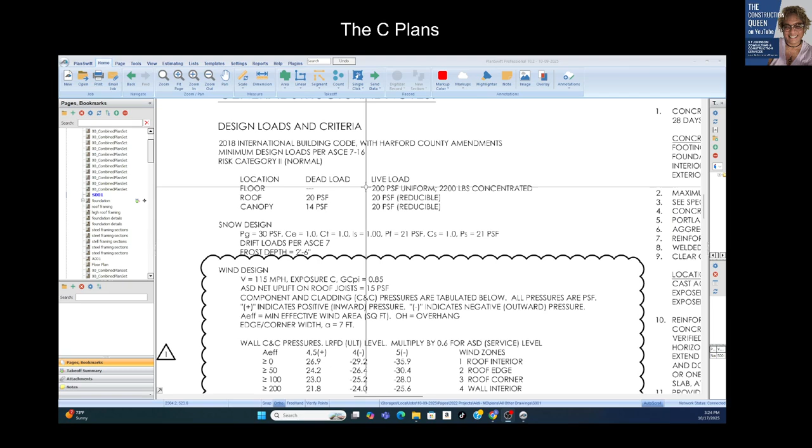All right, so we are looking at the cover sheet for the structural set. And if you look at any cover sheet, you're going to find load information. When they say load, it's basically weight and how much the building can hold, including the building itself. Now, as an estimator, it's not really something you care about, but it's good that you understand it. Part of the quiz is really about helping you understand that. So let's talk about the different types of loads.

There are three different types, and the structural set is designed to address all three, depending on the purpose of the building, what the building is going to be used for. It has to be designed to carry the weight of whatever's inside the building and hold up the building itself. So we have three types of loads: dead loads, live loads, and environmental loads.

The dead loads are basically just dead weight, right, permanent weight. That consists of the roof framing, the walls, the concrete slab, everything within the building is part of the dead load. The live load is temporary or movable stuff like people and equipment and snow and furniture.

Then we have environmental loads, which are wind, hurricanes, earthquakes, seismic activity, and soil also takes into effect. Depending on the type of soil you have, it really depends on the type of foundation you're going to have to hold that dead load and all the live loads that come through, plus all of the environmental loads that could happen every winter.

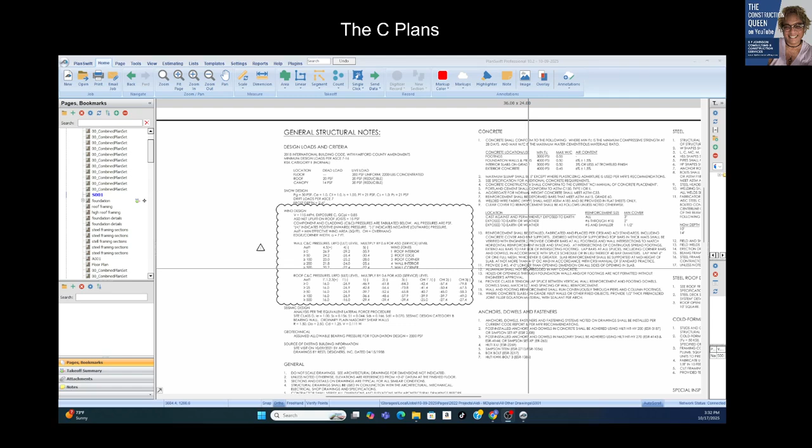Okay, so now let's look at the cover sheet. Of course, the cover sheet is going to give you all the information about what is here. And this is not so good of a cover sheet because I don't see the sheets that are comprised within the set, but they're here.

All right, so the foundation. When you look at a set of plans, they're usually starting from the bottom up. So the first set you'll see would be, and it really depends, I shouldn't generalize, but in most cases you'll see the foundation. Okay, and so what do we see? It's the bottom, and the foundation comprises two or three components. It really depends on what the building use is.

Right, we have the slab. Okay, so it's going to tell us the thickness of the slab on grade, and that W/WWF is not a wrestling team. It is a configuration of mesh rebar that we put in the slab for reinforcement. Okay, so we have to know what that is. Okay, and then we have the foundation. So foundation footing, or the perimeter of the foundation.

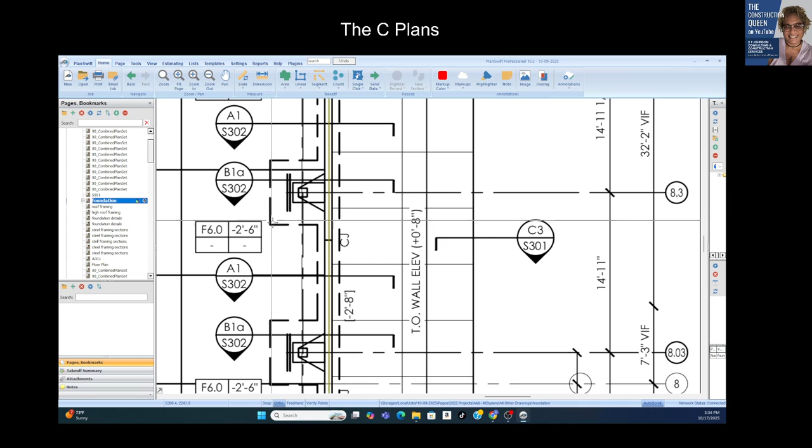A foundation is pretty much three components: the slab on grade, the continuous footer, which is basically the perimeter, and all of the section views outline where we have to go to get details about all the configuration of what here is representing a foundation footing.

So how do we know the component parts in a structural set? Everything, I mean, you look at this, it tells you thick set tile, finished floor, but it's on top of a 4-inch concrete slab on grade.

We know the structural set is the set with the least amount of plans, the least amount of sheets, I should say. We have the foundation, we have the framing, we may have the shear walls if it applies, and then the roof framing shows us also the headers. So we don't have very many sheets in a structural set. Everything that comes after that are all of the details and the section views.

When we look at the foundation plan again, a foundation is three component parts: the slab on grade, the continuous footer, and then, in some cases, we're going to have column pads, which is represented here.

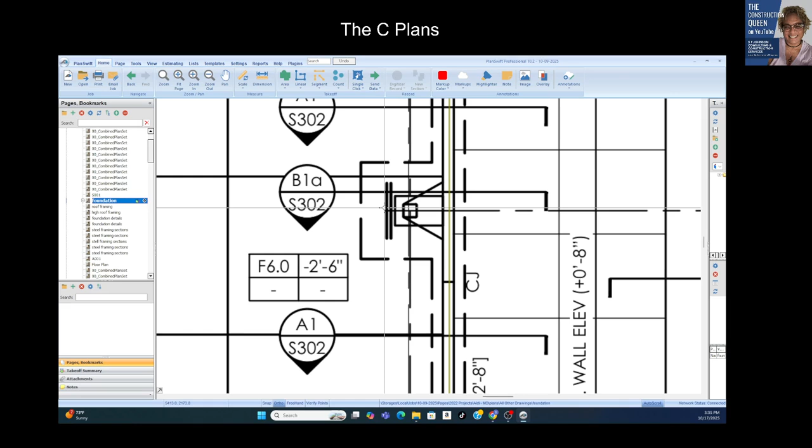So how do they represent the column pad? It's just a square. Imagine in a parking lot, there's always some square piece of concrete that something is sitting on, maybe a light pole. It's the same thing here, where the column is represented by this symbol, this square, and that tells me we have a column inside what they call footing 6.0. The column pads are always square, so they don't have to give us the other dimension. It's 2 foot 6 inch square, so both sides are 2, 6.

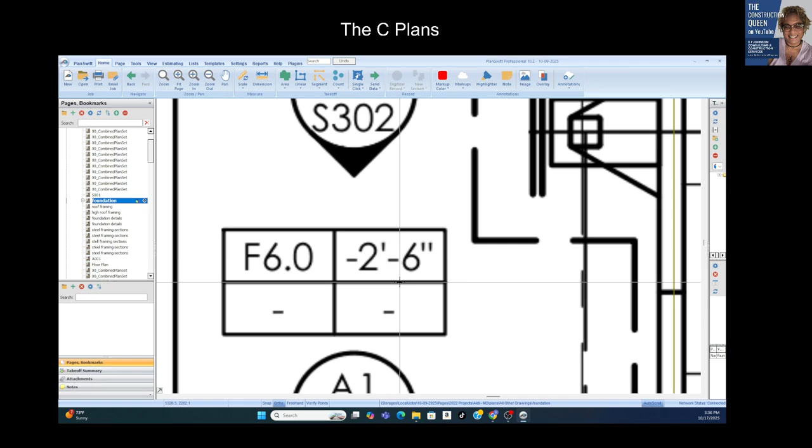I mean it's really simple. So this is the plan view, the view from above, the most basic of the views. What can we do from the plan view? The only thing we can really do is measure the area of the concrete pad, and we can also measure the continuous footer.

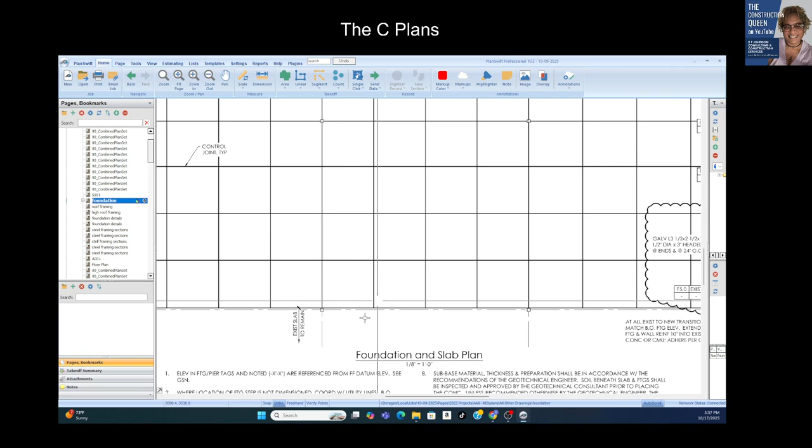But it looks like, and I don't believe that this is from the ground up, because there's a lot missing. This makes no sense if it's from... yeah, see, existing slab. So it's just a portion of it getting replaced.

So what we have to do now, if we were going to do the takeoff, we need to know this is a continuous footer of some kind that's going to be represented when we look at image A3 on picture S302.

This is a section view marker where it's his little head, his hat, his leg, and his foot. That lets me know that whatever I'm referencing, looking from this direction, it's only this portion of the wall. Section view markers are very tricky because you see we have so many lined up, and you have to make sure you understand the difference, where it breaks off and continues.

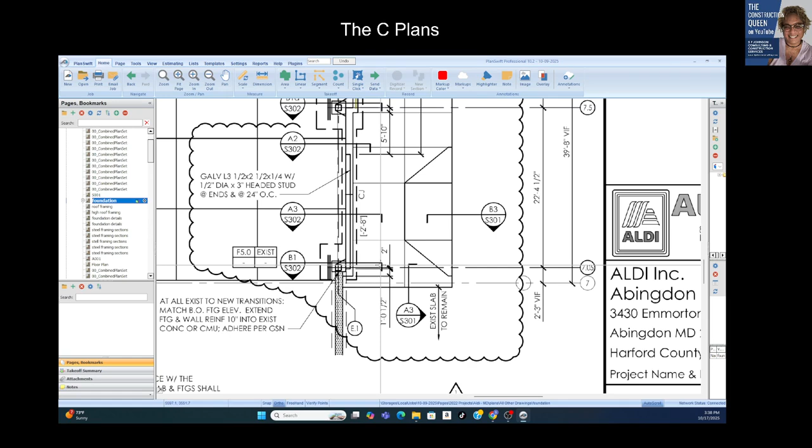It's really not that serious. As long as you represent the section that you see, you can go over by 5 feet and you'll be all right. So what this tells me is that A1 over 302 is the section of the continuous footer from here to there. But we have that in quite a few places, right? So it's from here to there, and we stop where we see the other section view marker. It's confusing sometimes for the first time, but it's not to where you're going to lose your mind. You just have to know where to start. This is kind of lame.

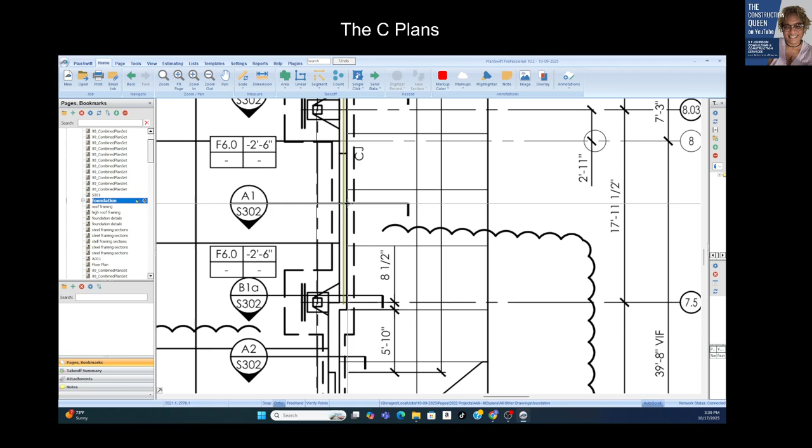But let's look at what it's trying to show us. Every time I mention a section view marker, whether it's a wall or a continuous footer, you want to think about it this way: think about the view you're going to see at A1 over S302. What am I going to see? I'm going to see the interior construction at this portion of the continuous footer.

So you want to imagine that his leg is a knife, and this is like a little piece of French bread or whatever, and you're going to cut it and open it up, and you're going to jump right in the middle, and look in the direction that his little hat's pointing.

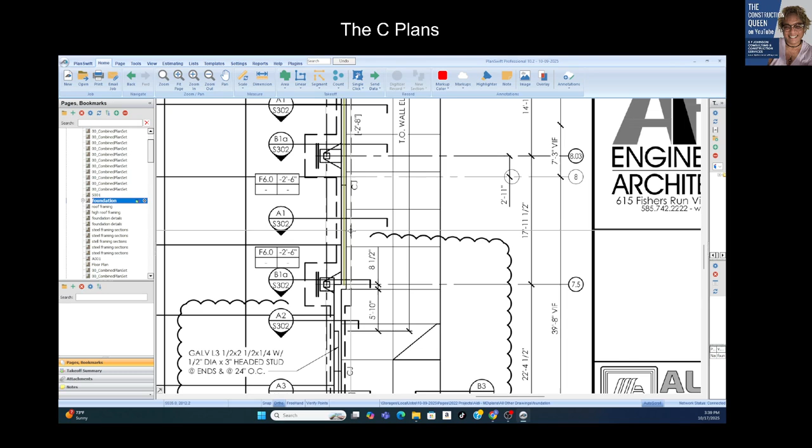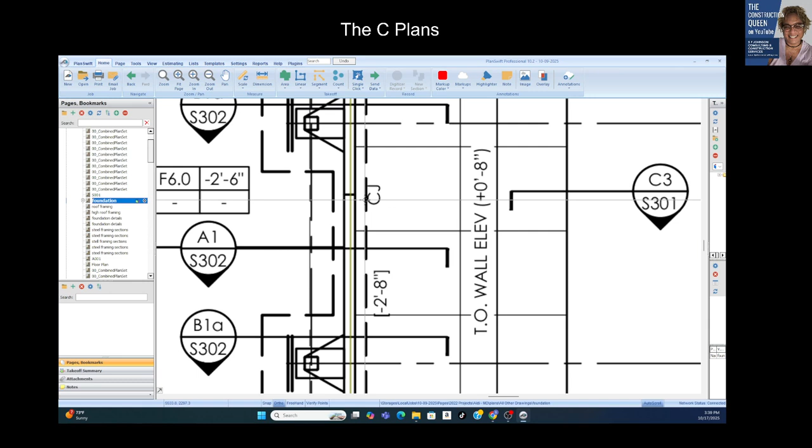And what you're going to see is just the interior construction. So why do you need to see that? Well, if I'm the concrete person, I know that continuous footer has a depth, a width, and a height, and I have to determine that in order to do a proper takeoff - to figure out how many cubic yards of concrete I need, how many linear feet of any particular size of rebar. That's what we have to do.

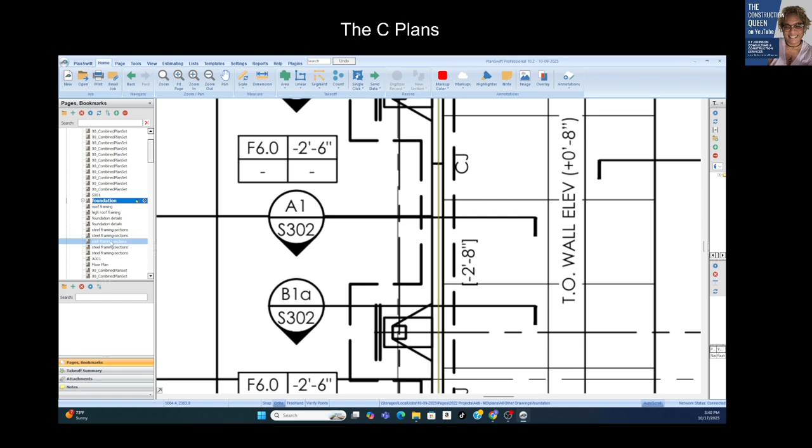All right, let's go look at any one. Let's go look at image A1 over S302. We've got to find S302 somewhere over here. A1, 302... 301... Okay, image A1 - it always starts up here and then goes to, like, so stupid how they do it.

Okay, so what do we see? We cut it like a knife, and now we're looking in the direction. So this helps you tremendously, right, if you're the concrete person.

Now I know that the continuous footer is 2 by 1, and I know that it has a stem wall - we can call it a stem wall - and we can determine, because it's to scale, the height of the stem wall and the rebar configuration. I have an L I've got to put in.

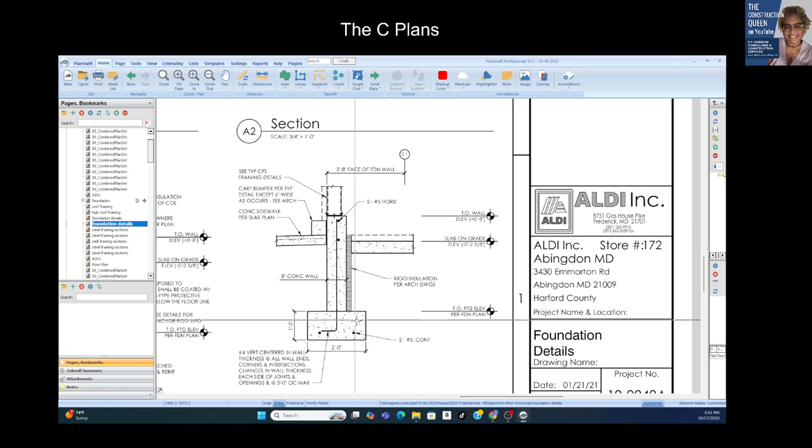So what's this mean, right? It could be a piece of rebar, right? We cut it like a piece of French bread. Now we're standing in there and we see how the bread is made. It's pretty good, huh? The bottom - let's start from the very bottom - so we have two number 5s, number 5. I've been doing this all day and talking.

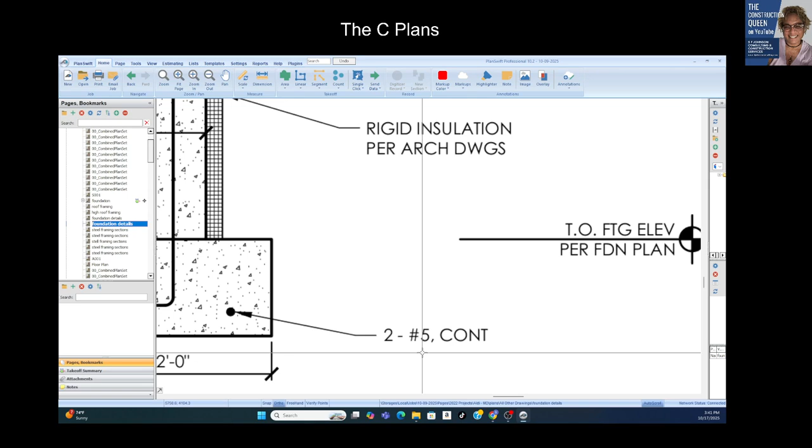Okay, two number fives continuously. What's that mean? So the whole length of that section that I measured - in this case, probably the whole perimeter. This one section is probably the general footer, typical, right? Typical exterior wall section. So it's going to be 2 times whatever our length is of the perimeter wall. 2 times that is our number 5 rebar. Bam, we got that takeoff done.

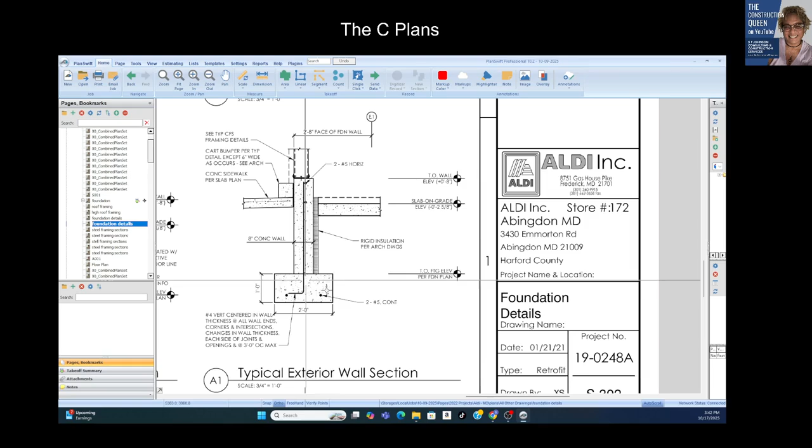For this one, we have to make it an L, but we have to determine the height of the L - how long is this piece? Well, it's to scale, so you really don't have to guess. You can measure.

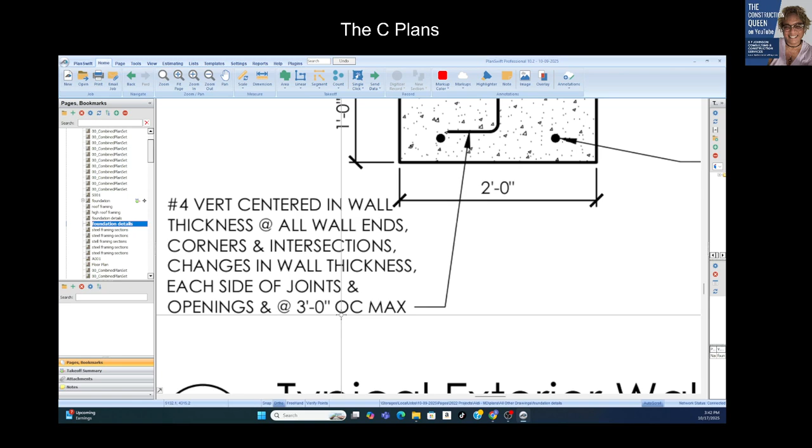So I need - and we're going to put it at every 3 feet on center max, right? So we need to produce these L's, and we have to put one every 3 feet. So if we had 300 feet, 300 divided by 3, then we'd have to make 100 of those and put it every 3 feet. That's how that works.

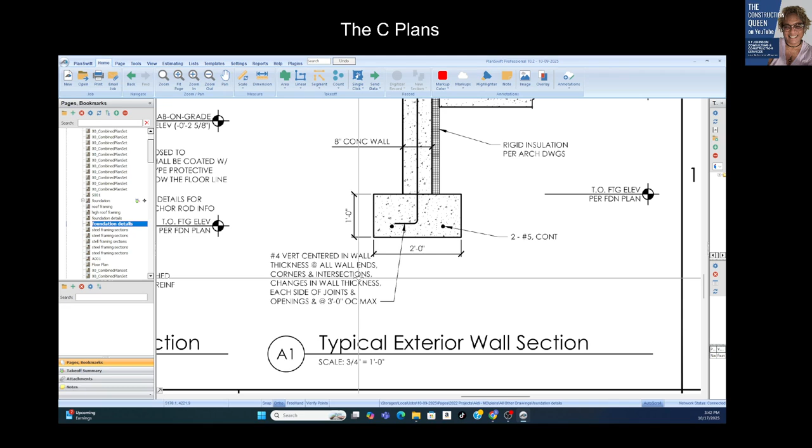So 100 times whatever the length is - okay, I have an additional number 4 that I have to produce. Then you work your way, you just go all the way up. And then we have two number fives horizontal along the perimeter. So basically, in terms of rebar count, it doesn't make a difference, it's the same - you have four number fives on that perimeter, and then however many of those L's you have.

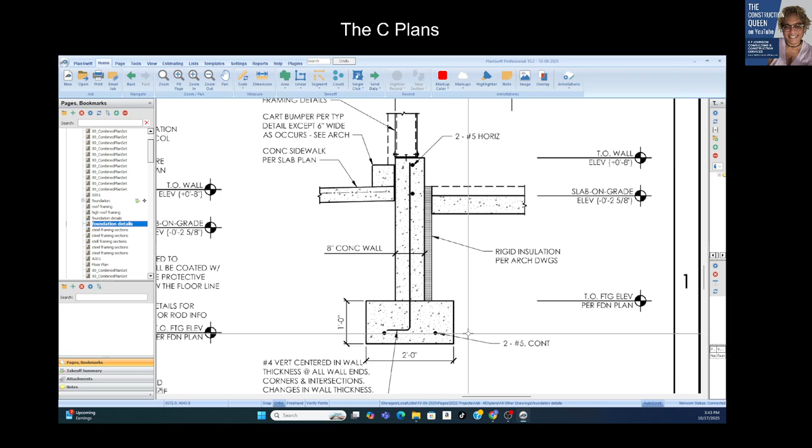Now for cubic yards, you turn everything into cubic feet first and divide by 27. That gives you how many cubic yards of concrete. Your concrete needs three dimensions in order to get cubic - cubic is three. So one dimension is the width, the height is the second, and the third dimension is the length. Whatever we determine, we measured the length. So you multiply all those together, that's cubic feet, divide by 27, you got cubic yards.

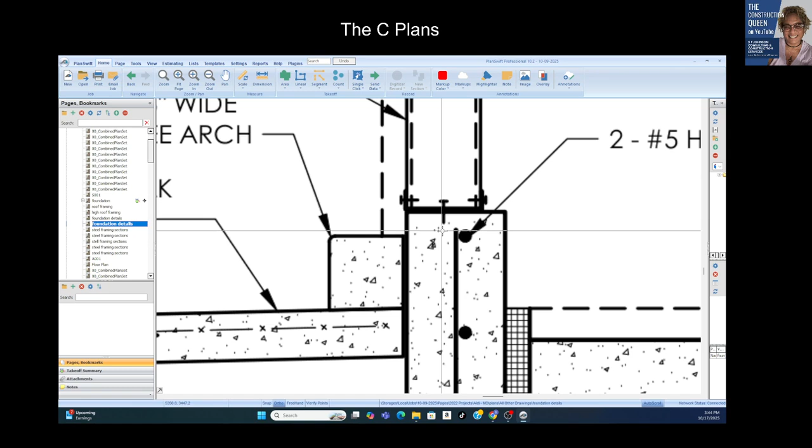Same thing with this - what's the width of this wall, the height of the wall, and however long it is. And then we have these - how many? We've got to do those. If we're doing the structural portion, those have to be in, or maybe not - it all depends. But we see that they're not marked here, so they're not giving us detail about it. So it's somewhere else in the plans. We won't worry about it.

Okay, but we just want to focus on this, and all of the section views will give us the same thing. So existing is already gray, so what we don't have to worry about is this at all. We just have to do whatever the new stuff is.

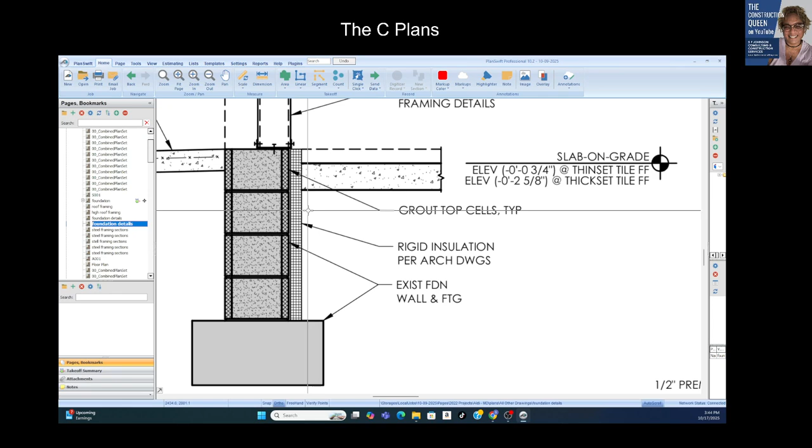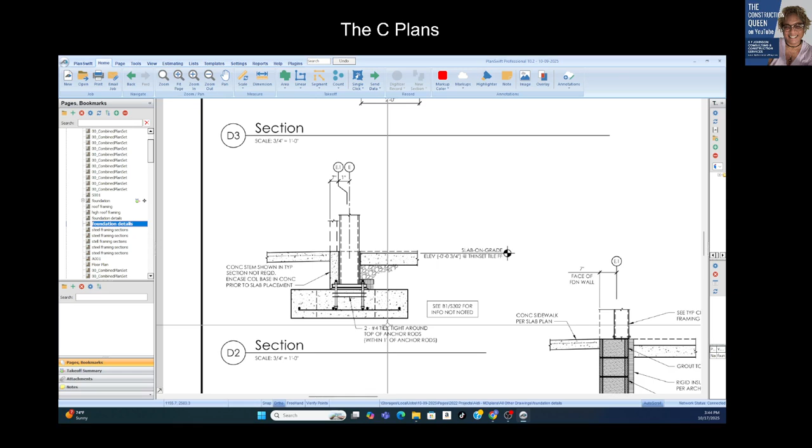Okay, so we have to do all the new stuff - the insulation and whatever else. The section views are critical because it's good when they're drawn to scale, so you don't have to guess. It's easy to eyeball it because they'll tell you this is 2 feet, and then you can figure out the rest - that's another 2 feet, that's 2 feet, maybe that's 8 feet.

I don't know, but it would tell you somewhere. All of the footers have a schedule for each one, so you know the dimensions. And they're always square - so if it's a 3 foot footer column base, it's 3 by 3. So that's the foundation.

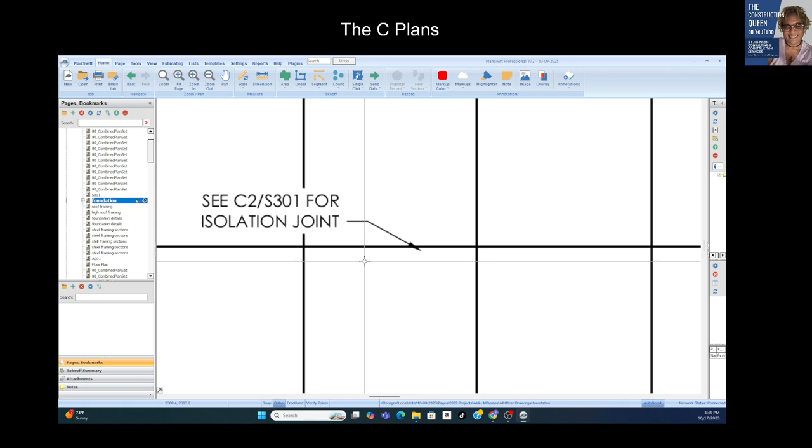That's the first part we'll see, and there's always other stuff you have to do. All of the control joints - you have to look at the details on exactly how they want the thickness, what they want in it, all that. You have to be able to look at that. When you measure the length of the control joint, whatever you see there is the same in terms of material and takeoff - it's the same length. Same thing with the footer.

Now let's look at this one, because it's giving us a section view through the column pad - not information about the continuous footer, but about the column pad. If all the column pads are the same, they wasted a lot of ink drawing them all out instead of just doing one and marking it TYP. So every time you see that symbol, you know it's the same makeup as the one marked TYP. If you ever see that, that's what it means.

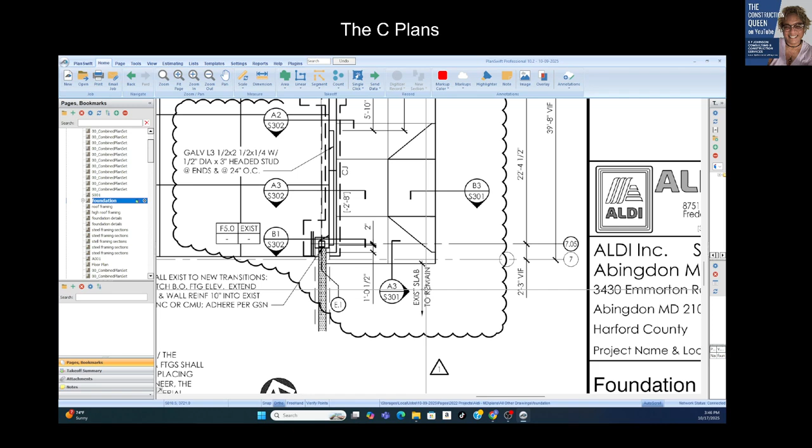And here they're giving you how you have to reinforce the new to the existing - that's really important. The revision cloud means they made some changes, and I see a lot of revision clouds without a note. You have to have that, because it's pointing you to what to read about what was changed.

All right, so let's look at one of these to see the difference between the section view at the continuous footer and the section view at the column pad.

B1 over - it's getting late, and I'll be 61 in December, so I'm blaming everything on age these days. All right, B1A over 302. Let's see, I keep going too far - 302, 301, 302. All right, B1A, where is it?

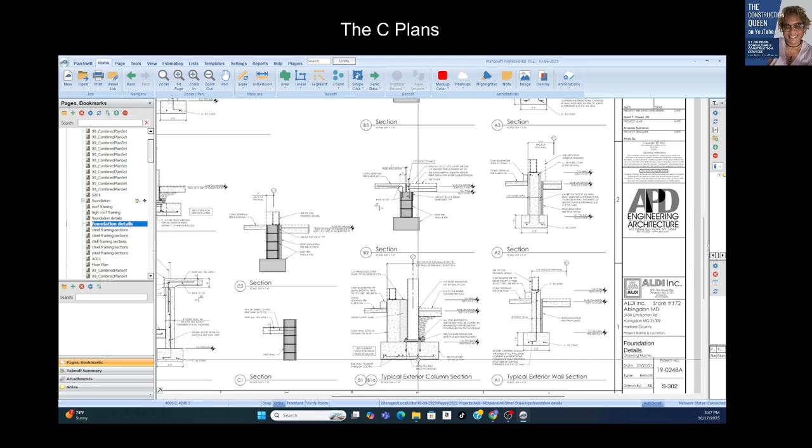Here we go, okay, so yeah, that is our column right there - that's our column pad, edge of continuous wall, the continuous footer beyond that. So the continuous footer cuts off somewhere inside, maybe adjacent, but we can see that from the plans. So what we have to do in this case - it's got a lot going on.

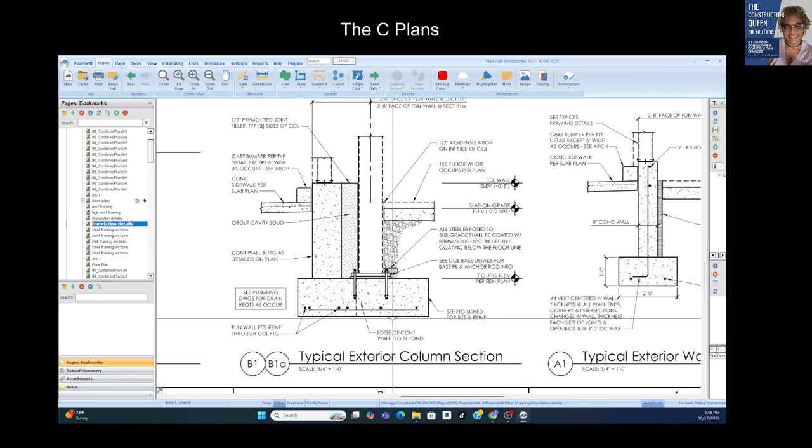Okay, so it has this column pad, and we have to determine this total. Again, it's probably just up against the column pad. You have to see how far this continuous wall is as detailed on the plan - so we'd have to look at that one, because there are a couple of costs related to this when we talk about the takeoff and breaking it down.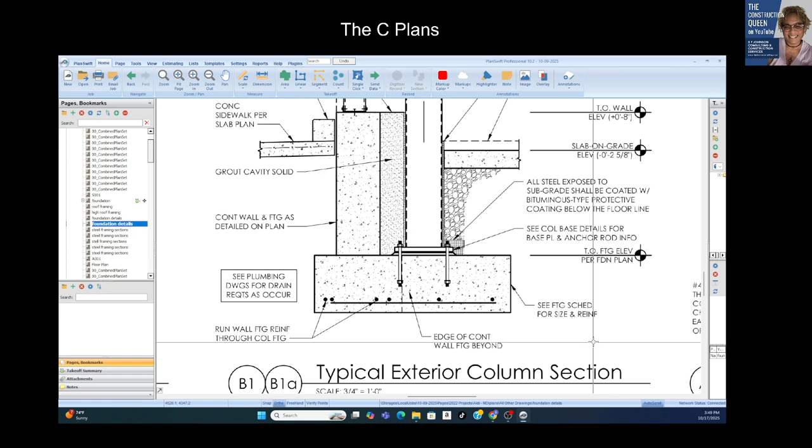The footer - look what the footer has on it, a lot, right? So the footer has one, two, three, four, five, six. And again, it doesn't give us the information here directly - is it number five, number four, whatever - because it tells us this instead: see your footing schedule.

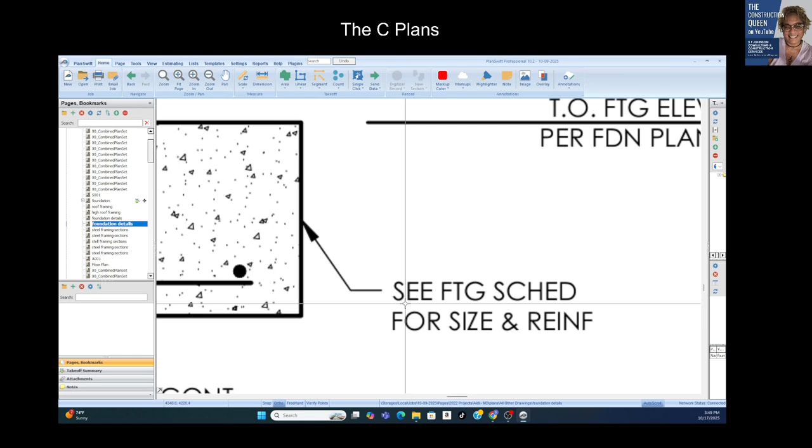Each one we saw, like F6, F5, and so on - well, it's all over there. Let's find it. It might be on the front part, you never know. And I don't have my glasses on, so I'm really tripping. Oh, there we go, there we go.

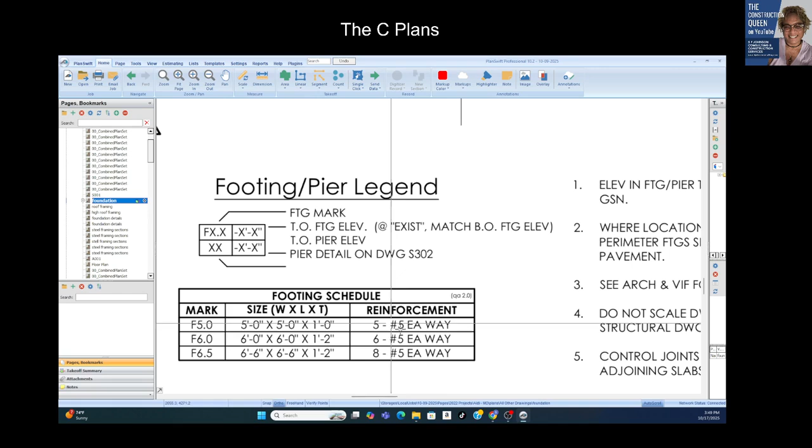So we only have 5, 6, and 6.5. They're 5 by 5 by 1, 6 by 6 by 1 and 2 inches, and so on. So one has 5 number whatever's, and 6, and then 8. That's easy - like my grandson says, that's easy.

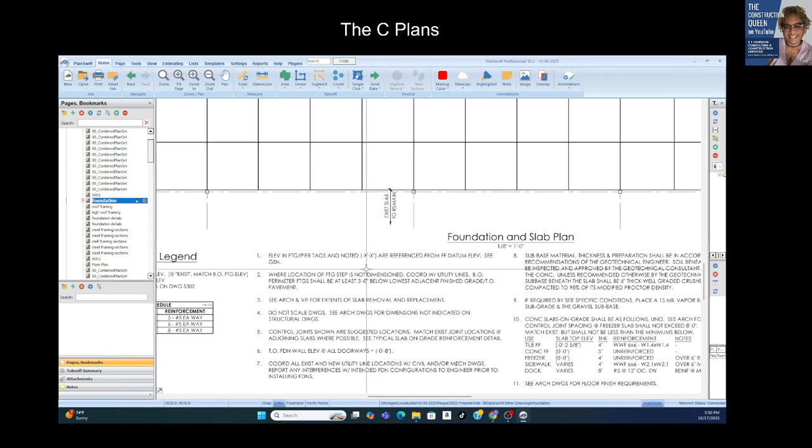And if you have a good tool like we do, you will get the cost per column pad. It will include the concrete, the reinforcement, the excavation, and maybe finishing - something else, I don't know. And that's how you do that.

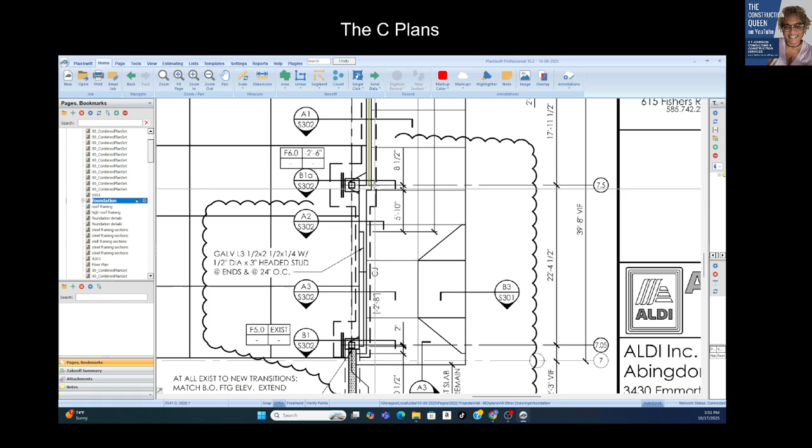Okay, the length is all based on the plans - that insulation, that wall. Let's see where that wall is. That's very hard to determine. Maybe right here, that's kind of tricky. I just have to guess. It looks like more from here to there. We'd have to determine which side was the wall and which side was the insulation. Oh, that's probably the wall side, and that's the insulation. Makes sense - the insulation would be on the inside, right?

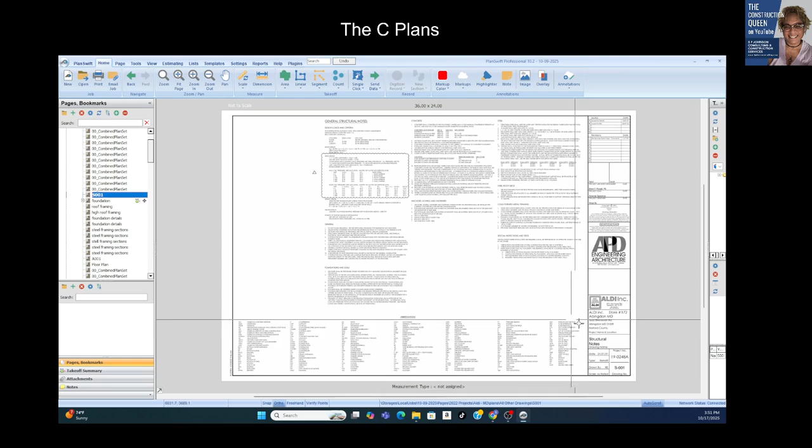Okay, so that's the first part of the structural set, the foundation. The second part is the roof framing.

Stacy is going to take a break, but you won't know it. I'll be right back.

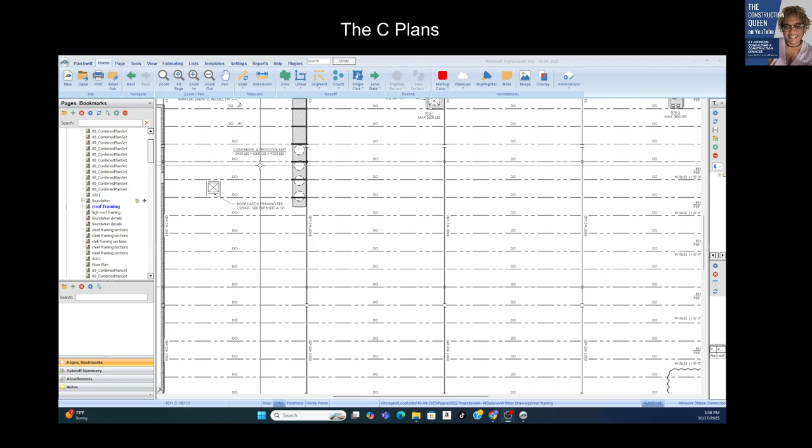All right, now let's look at the structural framing plan and how they represent the portions of the framing. We know that structural framing always begins at the roof, if there is any. How it's represented really depends on the type of member. We say 'member,' which is a generic term for the framing piece - a beam is a member, a column is a member, a joist is a member. When we talk about structure or framing, we always try to use the right lingo.

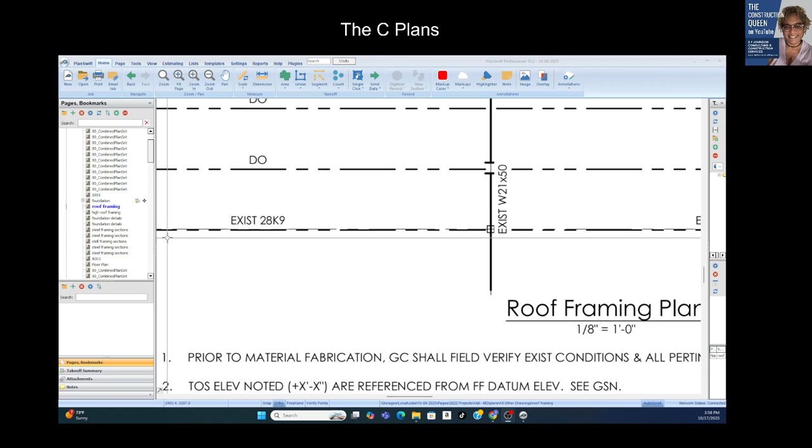We say member. So what we're looking at here is they're showing us that a lot of it already exists - most of it is existing, they're just modifying it. But just so you know, there are so many different types of structural framing members - there's beams, there's columns, made of wood, made of steel, iron, whatever.

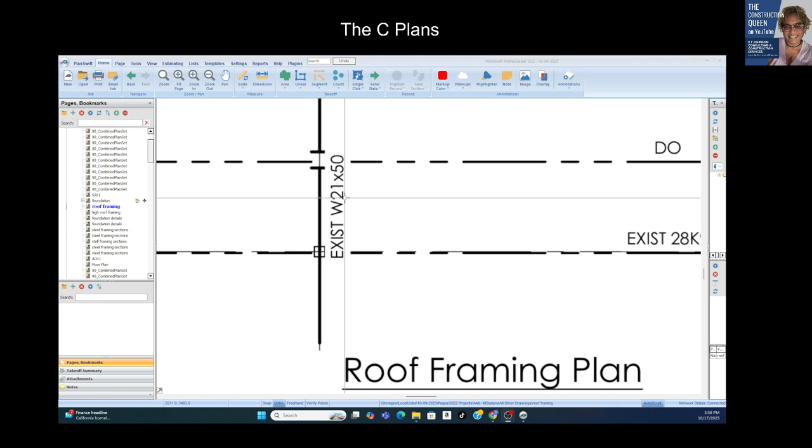But we know that this is a formed metal, and this type is fabricated metals. When you see the W beam, that's what those are - beams, right? And it could represent the beam or the column. In this case it's going this way, up against this line.

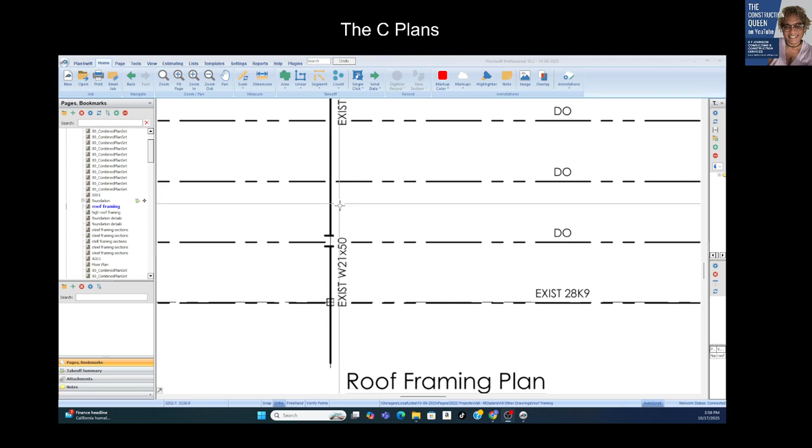So you've got to think structural framing - this is the framing plan, right? The plan is the view from above. It's as if we're in an airplane, there's no roof or anything, so we just see the roof framing. And so what we know from the plan is that these portions are W beams.

Really, the number on the beam signifies the width of one of the parts of the beam, and the second number represents how many pounds per linear foot. Remember, structural framing is all about loads and weights and stuff. That second number after the times symbol signifies how many pounds per linear foot that beam can hold. Which ones to use depends on the structural engineer, but when you're estimating fabricated metals, anytime you see that, those are priced by the pound, not by the square foot or linear foot.

So you have to be able to convert that beam to a weight, and it's very easy to do. If in this case it's 50 pounds per linear foot, you just figure out how many linear feet you have. If you have 1,000 linear feet, you multiply 1,000 times 50, and that's the weight, typically in tons. Yes, fabricated metals are priced by the ton, not by the square foot, not by the linear foot.

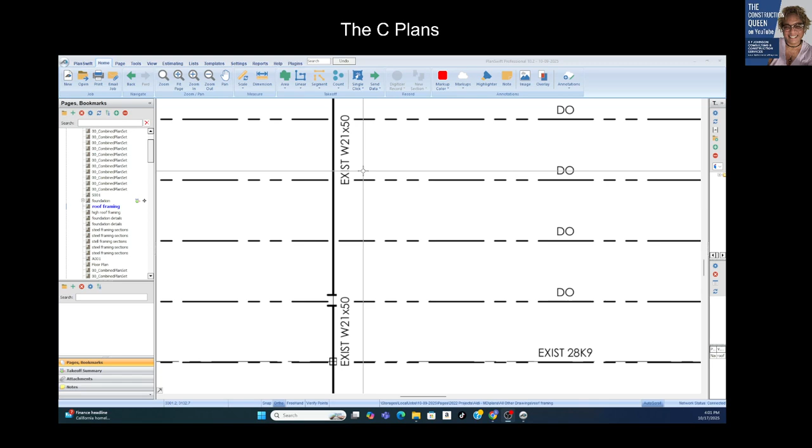So anytime you use beams like that, you have to do the math and determine how many pounds you have. Same with a W18 by 35 - that means it holds 35 pounds per linear foot. So once I know how many linear feet I have, I can determine the weight easily.

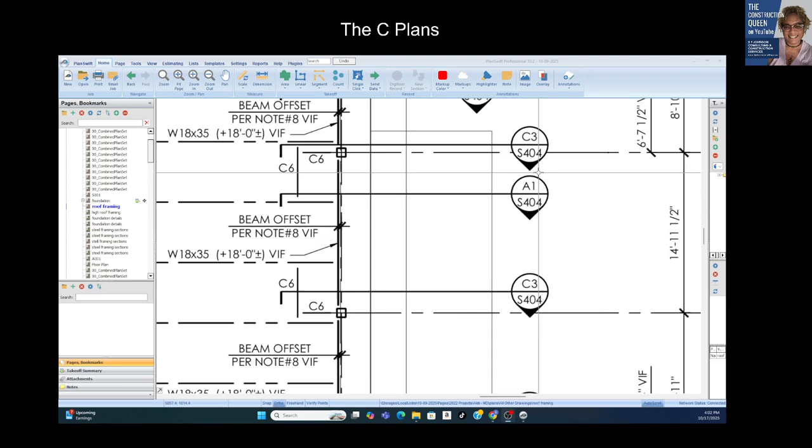Okay, section views still apply. Now let's look at some of these, because these section views don't apply to the foundation. Even though some of them may be the same, we're not looking from the perspective of the foundation - we're looking from the perspective of the framing, and all that good stuff.

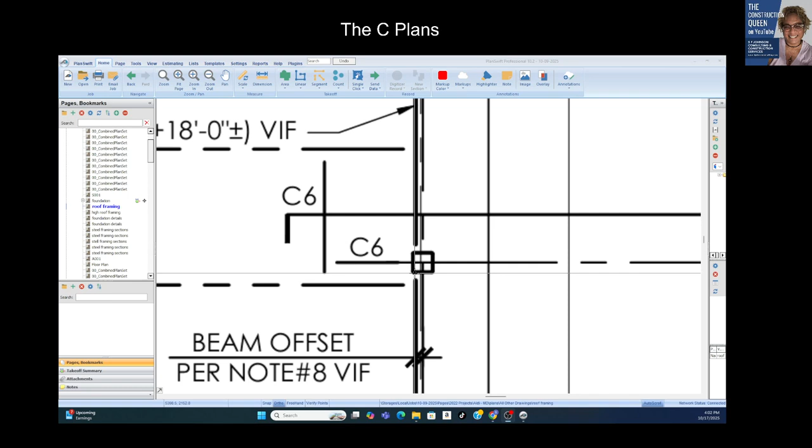Okay, so we know that this is column 6. We don't see that column pad because I'm sure column 6 is sitting in a column pad that we just saw on the foundation plan. But why don't we see it here? Because this is not the foundation plan - this is all about the framing and the headers and all that stuff.

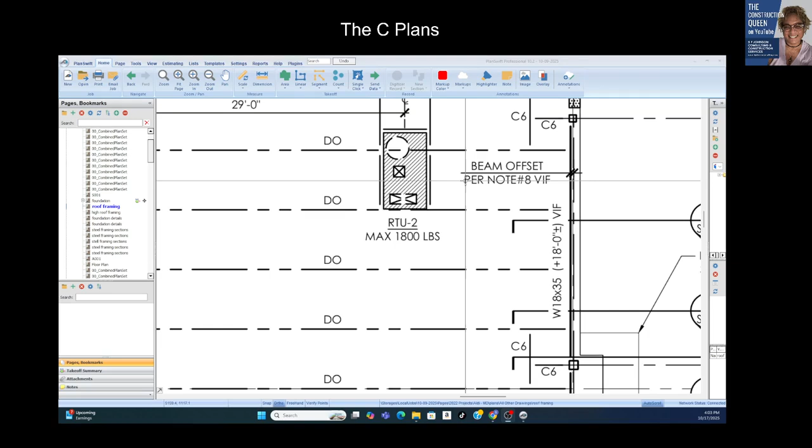All right, if there are any headers, it looks like we have some new rooftop units installed. They're heavy. Okay, and it does say typical here, so whatever we see there, we can just do one and multiply it by however many we have. It looks like we have 2.

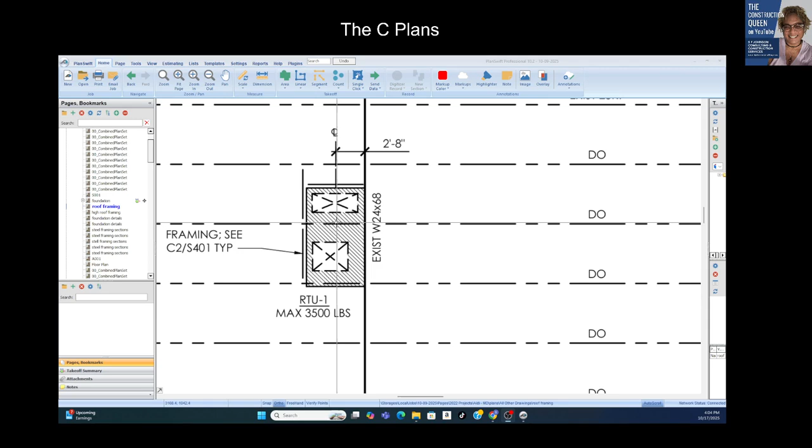This helps me a lot too. Now they say, do I need to know this? And I say, if you're in construction period, you should know how to read every set of plans, because there may be a time where the HVAC estimator needs to know the size of the supply and return grills. Both of those have supply grill symbols, but you can come here because everything's to scale. I can measure that if I needed to determine the size of a 90 or whatever I need to go up into the supply or return grill. I could go to the structural set and make a measurement and be close enough.

All right, so let's go to A1 over S404, steel framing, A1 404.

So there's a lot here. For the purpose of a takeoff, oh my God, that's a lot. Because what do you have to do in terms of a takeoff? This part, I think we got that in the continuation symbol. We should have gotten that from the plan view, right? The plan view will give us all the horizontal measures, but we need section views and detail views for the vertical measures. We got to see what each one of these are. Is it to scale? Because if it's to scale, yes, all of those little breakoffs and stuff don't matter.

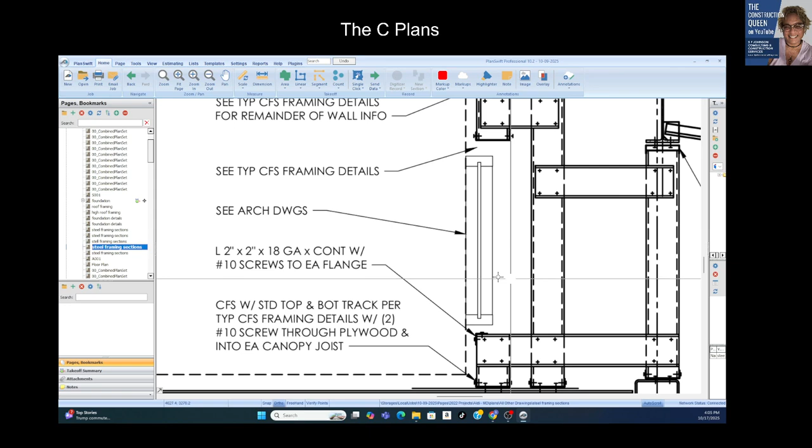I can pretty much see it's 2 by 2 by 18 gauge, see this right here. This is a takeoff nightmare, but you can do it. You just have to do everything individually, and because it's to scale, this doesn't make a difference. You can still measure accurately. Anything's to scale, somehow it's good. If there's a scale, you can scale it and measure, because yes, you would have to measure every piece and part of all of this.

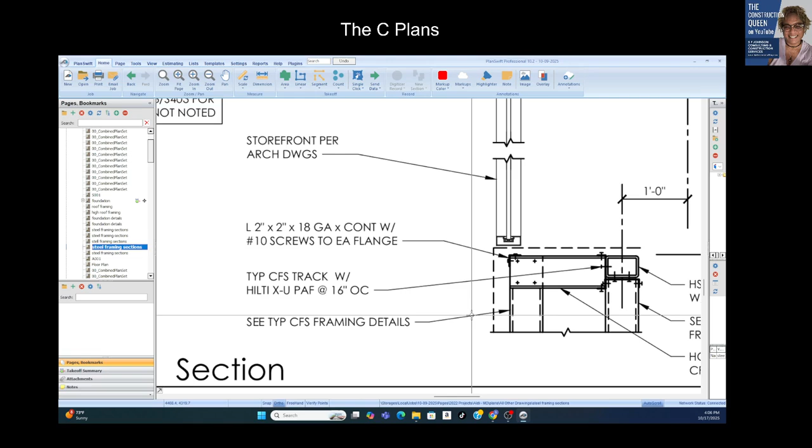This would probably be somewhere else, yeah, because it cuts off. So you got to know what's going on under here. We'll see the typical CFS framing details to get that. We can get that somewhere else, but for the purpose of this section view for our steel framing, we need it for all of this and for this. And I'm sure we have to see something else because that's not enough detail for anything, so they're going to send us somewhere else for that.

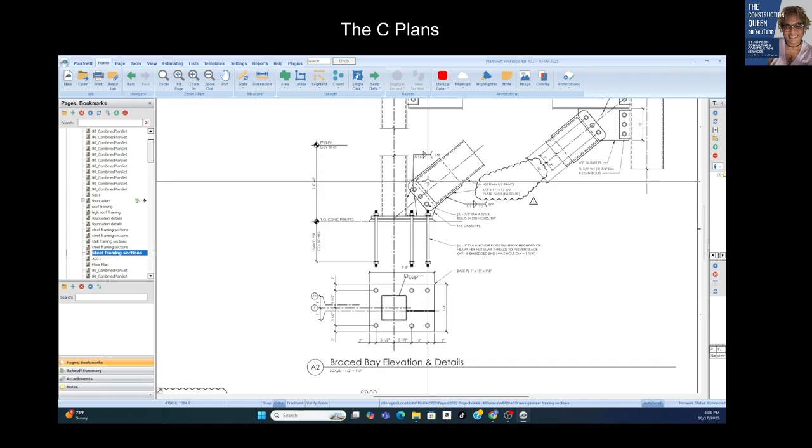So that's crazy framing, structural framing. That's why structural framing is a whole different beast than architectural set framing, because of this right here. And you've probably got a lot of them just like that. Oh yeah, you got a lot. I say, we got to do that, we got to do that. And in order to do that, you got to be accurate, very much so. I did a suspension bridge once, oh my God, but you got to be accurate, or don't do it.

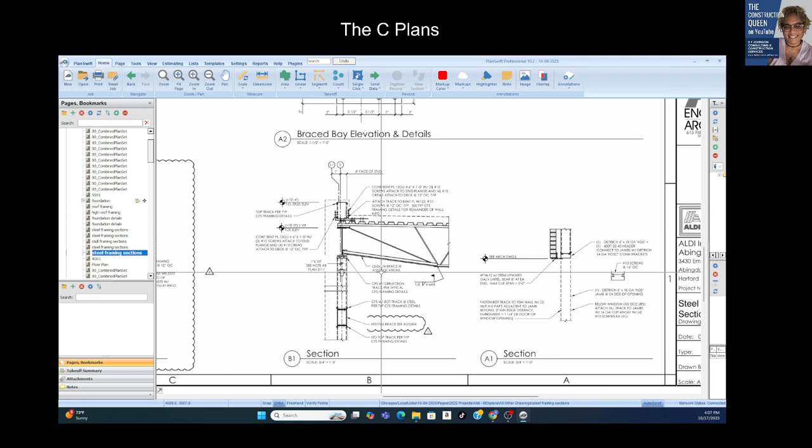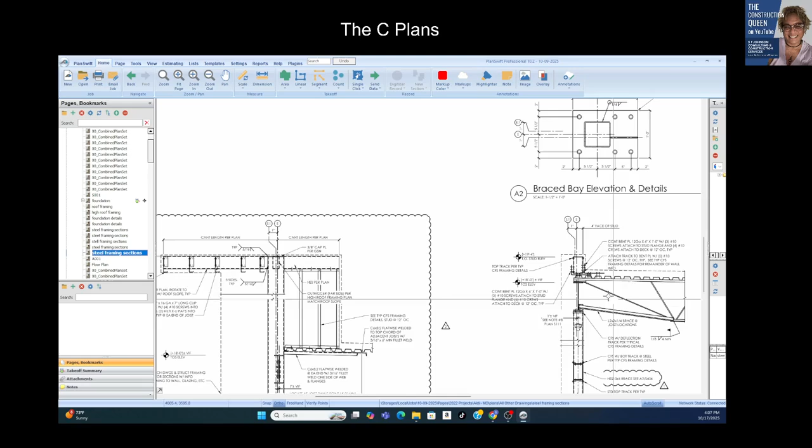So this set wasn't really... we didn't have any shear walls in this one because it was a renovation. So it'd just be one little sheet telling us to put some plywood somewhere, nothing big. So that's pretty much the structure set: the foundation, the columns, beams, girders, and all the roof framing stuff.

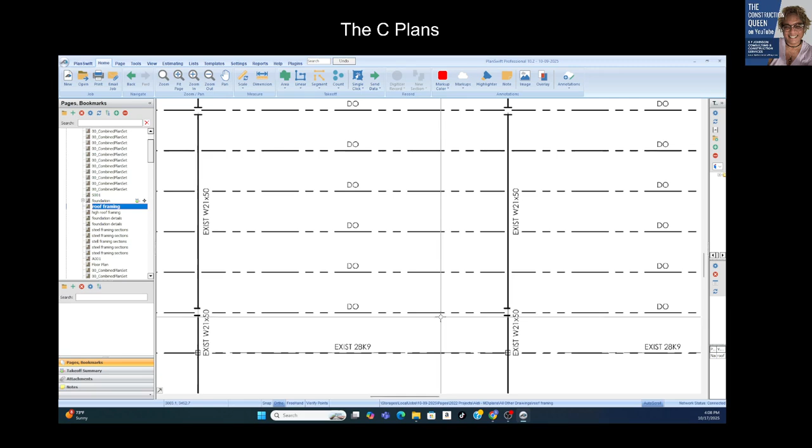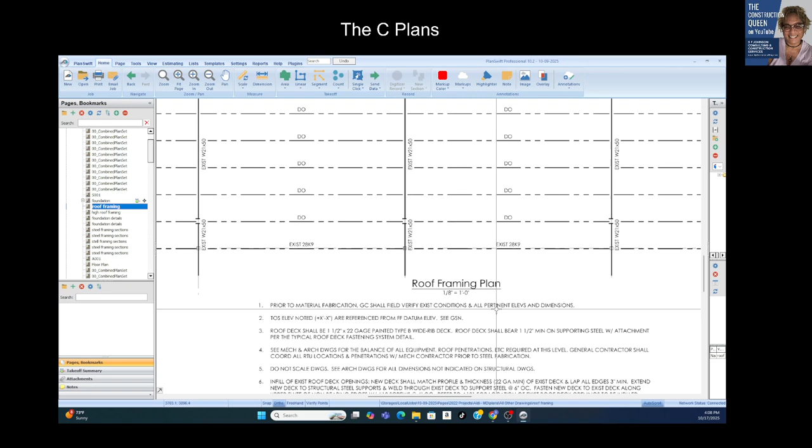You gotta know your W beams, your I beams. These use W beams. We don't even care what these are, but they gave us the type. We don't care about the joists, or do we? It's not existing, or is it? That's it, see, I don't know. For the purpose of this review, they already know prior to fabrication - verify, because that stuff's not cheap.

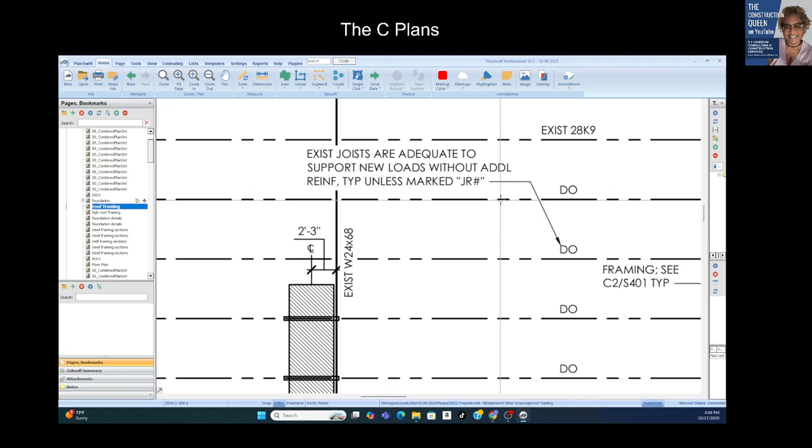Oh, okay, roof deck shall be... so the roof, this is all existing, it looks like. And then they're putting on a new roof deck that's adequate to support new loads without additional... okay, maybe not, I don't know what they're doing, to tell you the truth, but I don't care for the purpose of this.

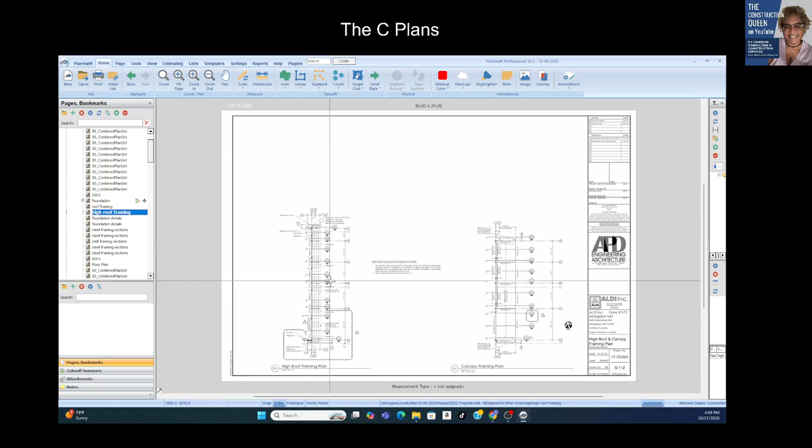All right, roof framing structural set. Nothing like architectural set framing. I think they have a high roof framing, and some of these are structural steel, 8 by 4 by 1/4.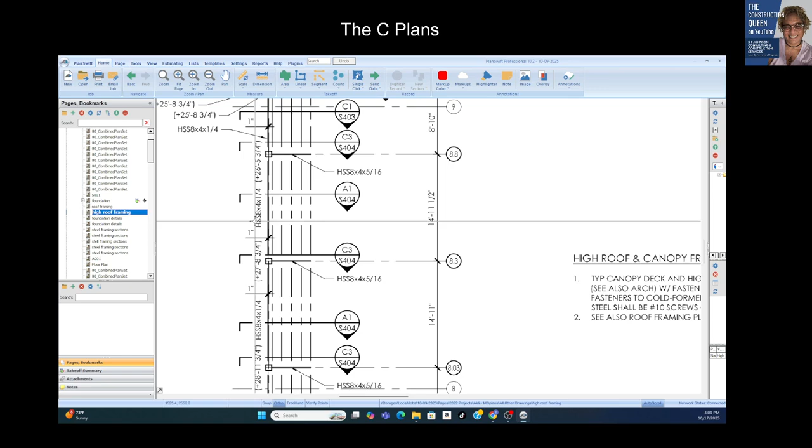So where they put it, they're basically telling you that's the outer portion. And this one here, 1000S162-54, joist at 16 inches typical max. This represents a column, because we're looking from the plan view from above. So this is the high roof, they've got a little high roof up there.

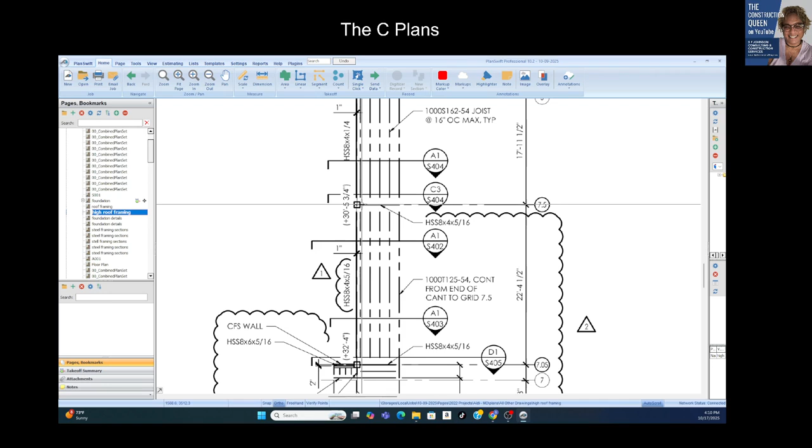If we were really doing this, these are all different sizes. See how it's different for this stretch? We typically go from column to column, unless it shows us something different. So that representation of structural steel, basically a beam, we'd say in terms of length it's going from column to column, from here to there. Then we've got to look here and see what the connection's all about. That's what this is showing us, the connection between the joist and the outer portion of the beam.

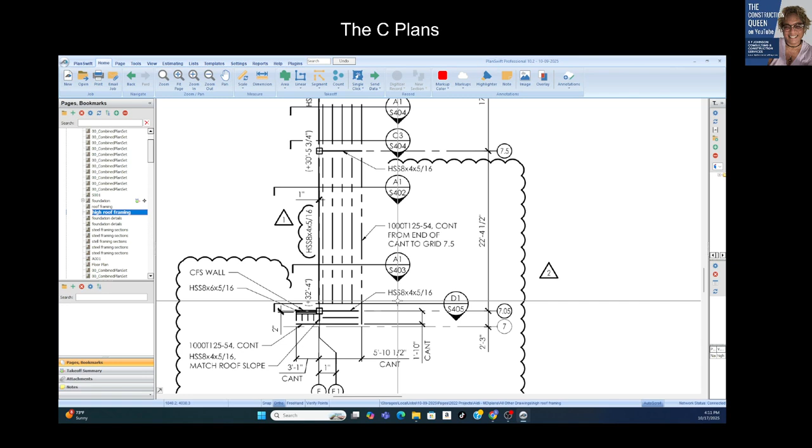It's crazy, and you basically have to, it really depends on how you price it for your estimate. What you'd get off a cost book would more likely be a cost per square foot, but in real life you've got to know how many linear feet of all this stuff you have, how many linear feet of each one. It says continuous from end of cant strip to grid 7.5 - I'm sure that's what that means.

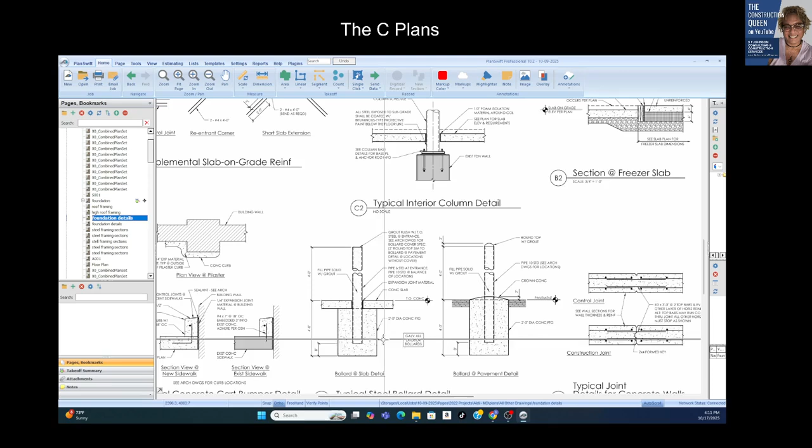Interesting for the structural set, and then more details. Foundation, how the pipes have to sit in, and you've got to be able to determine how many cubic yards. Just make sure you've got three dimensions: the width, the height, and the length. That's your cubic feet divided by 27, and you have cubic yards.

All right, so that's going to end this presentation of the structural set.

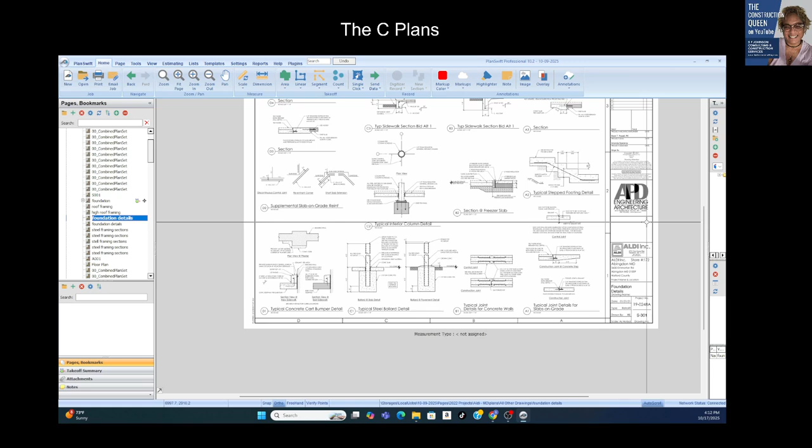And no, you won't, because I've got to make sure we're clear with everything you need to know for this test. So let me go back - this is going to make it even longer. Where are we? Let's see, the conclusion is at 4346.

All right, so we know how the load transfers, we know the dead loads, we know how the roof framing is associated - the beams, the girders, the columns, the footers. We know what the lateral load is - dead load, live loads, and environmental loads. And how each of the plans relate, so you'll be able to tell me how each component part of the plan is related to each of the load paths, just based on what I already told you. So make sure you can.

Now we did go over the typical foundation - it has those three parts. But there are different types of footings, and it's important you know that. In commercial, we're always dealing with slab on grade, which would basically be a type of mat - slab on grade is a type of mat footing.

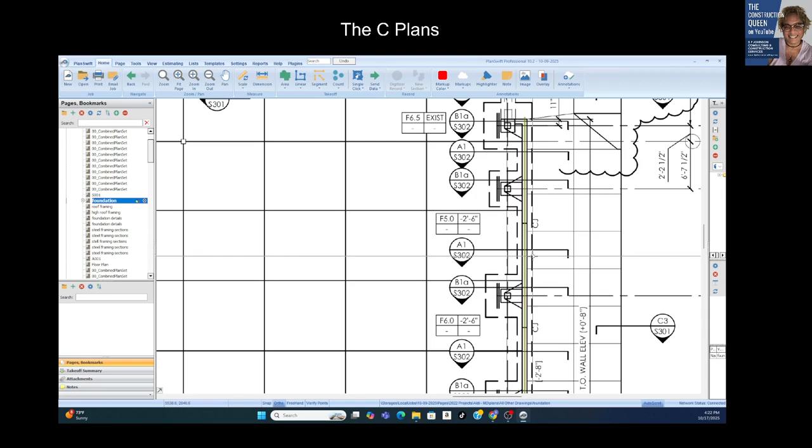Section views begin at plan view. Detail view begins at section view. Section view begins at plan view. So when you see the plan view, that's the first view, right? Plan view is going to always trigger section view, and then when you go to section view, it may trigger detail view. None of those views do you want to bypass. You want to make sure you understand everything you see at each of the views.

Now, if you had to take a framing takeoff, let's start with the foundation takeoff to get everything you need. This is the way that I do it, because the slab on grade is what it is—it's a big square. That's the easiest thing to do if you have an area tool. Boom, it's 4 inches, you know the area. That's the easiest thing to do.

But when it comes to the foundation footing, some portions may not be, as we saw from the section views, exactly the same. So when it comes to any of the foundation footings, whether it's inside the building or the perimeter of the building, just follow all of the section views, from beginning to end. I would follow wherever it made sense.

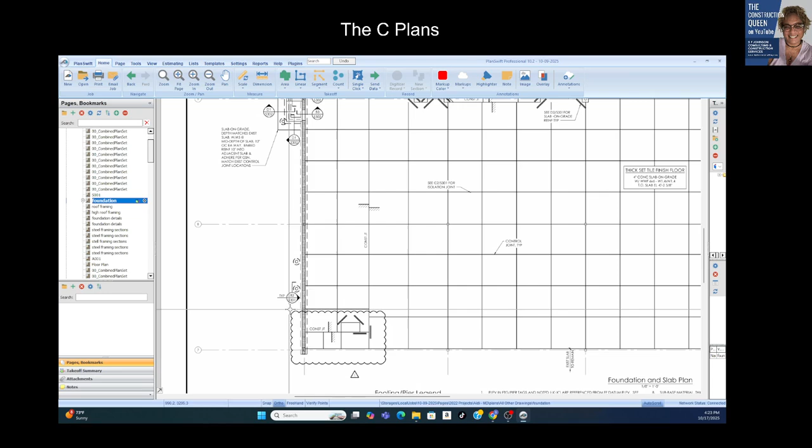I don't think any of this is getting done. So I'm in here, and I'm going to follow all of the section views wherever they lead me. I'll start here, and I know that this is a column pad. It's a column pad that differs from that column pad. When you look at the plans, you have to have a very detailed eye to know when things are different, because that's why they're leading you to different section views.

That's a column pad that has pretty much all four sides, right? This is a column pad, and I know it's a column pad because I see that's the representation of a column. And that is a column pad at the edge of whatever this is. So that's when they just put it in, and I know why they're leading me to a different section view.

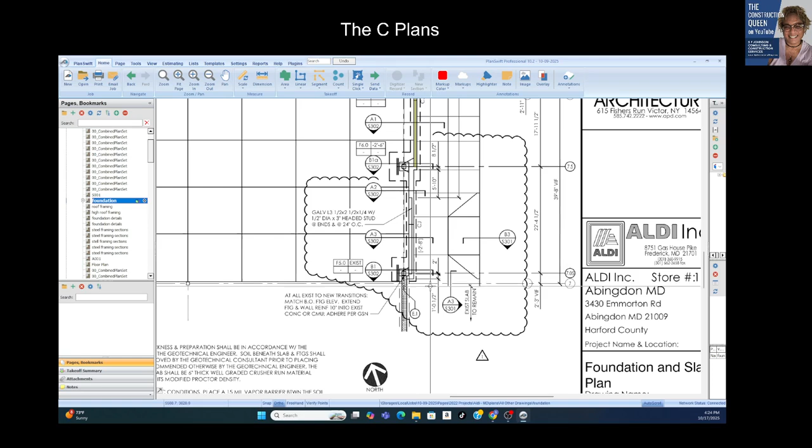That's B1 over S302, but this is B1A. Why? Because it's different—different in construction. That has four sides. I'm sorry, people, I got to keep sending you the voicemail. And that has only two. So yes, they're going to give you different views to look at.

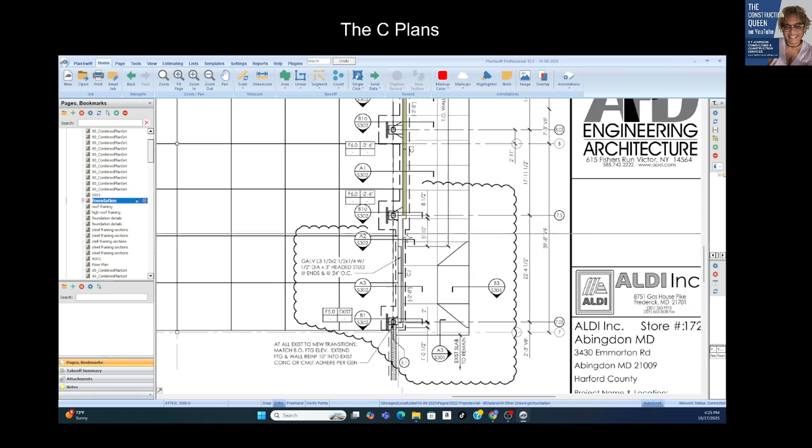Now look, here I'm going out B1A, B1A, B1A—those look the same. So once I do one of them, I'm just going to multiply by two to save you some time. And it's important to remember this section view is going through this section of the continuous footer, because the architect is saying there's something different about the construction here between the column pad and the next column pad, which is this stretch. There's something different about that construction than is at the column pad itself.

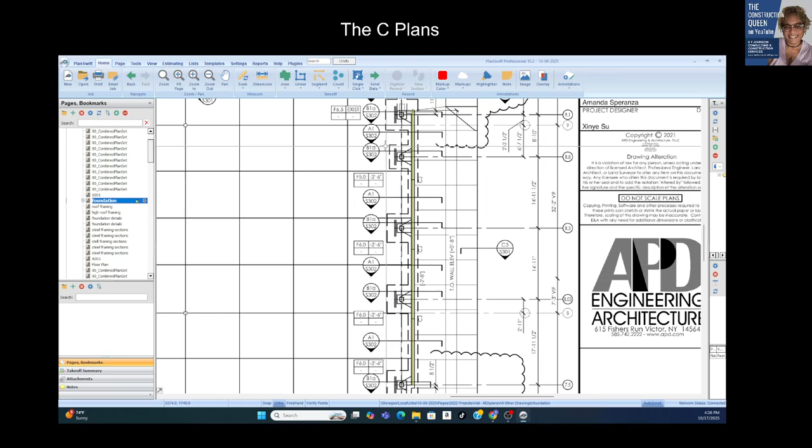And you see A1302, A1302, A1302—I could just measure it all as one, just keep measuring. I don't have to break that up because it's the same, and it's basically the framing in between all of the column pads. So I'm just going to go all the way down and then incorporate each of the column pads individually, or anything else that's different.

So it's a little tricky, but plan view takes us to section view, and section view will take us to some other detail view if necessary. It may not be necessary.